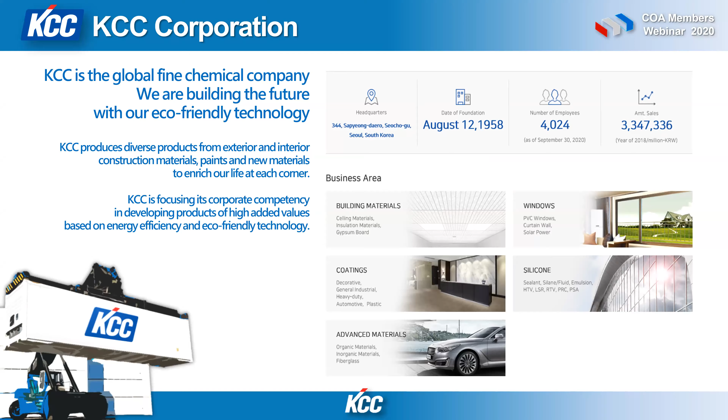Also very pleased to welcome Kim Scheibel, who most of you know. Kim is Group Segment Director for Containers for Hempel. He's been based in Shanghai, China since 2017. And obviously he's got a huge amount of experience in the industry, 40 years with Hempel, got all sorts of high-level positions in the company, and he still looks younger than most of us. So again, very pleased to welcome Kim to the panel.

Also, we have Tom McAfee from PPG. He's Global Segment Manager for the Trailer and Intermodal divisions of PPG. He's also been involved in the industry for a long time, 39 years it says here. So again, he looks remarkably well for the amount of time he's spent in this industry.

And a bit of information about PPG there. And again, you'll have the slides. You can look at that more closely later. And also, finally, we have Zorro Pan, who's Coating Technical Manager with CIMC Containers. Zorro, again, has huge experience in this industry, and you really all know about CIMC, but there's a bit of information just in case you don't.

So the way we're going to run this is we're going to have a series of questions from myself, and I'm going to ask the panelists to respond to them. And again, please feel free to ask questions during the course of the webinar as we go through it, if you've got any points you'd like to raise.

We're going to start off with the environmental legislation section, and as I mentioned, it's been a hot topic. It's an important issue, and I really want some clarification from the panelists about where we're at with the legislation, and what the implications are.

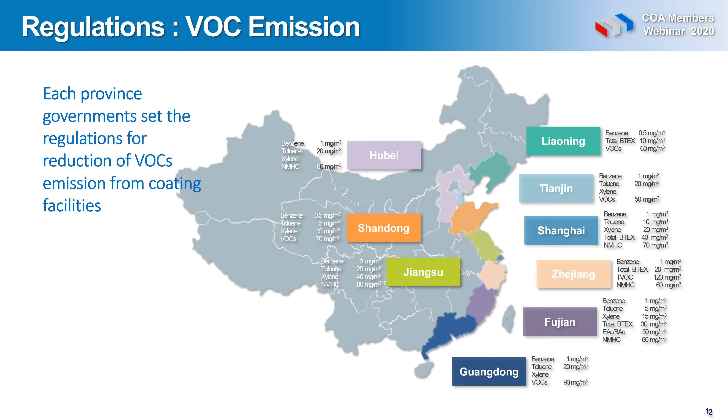Kim from Hempel, can I ask you just to summarize what the environmental changes have meant to the coating industry as far as the investment to provide waterborne coatings and technical support, what level of investment this has required, and a little bit about the changes there? Yeah, thank you, Patrick. Sure.

I can certainly say, first of all, in relation to investments, it has overall meant that we today have many more coating suppliers fighting for the same size of production, which we've had for the last 10 years or so. So the low margins we were accepting in the past have even shrunk further to a level which for the dry cargo containers have made some of us abandon the scene for a while at least. So from the dry cargo manufacturing point of view, I fully understand what happened.

We, and I mean here, speaking on behalf of all the coating suppliers, we were initially able to copy the 3-coat solvent-borne system, which, as you know, consists of a zinc-rich epoxy acrylic top coat, with an equal or better performing waterborne solution, even matching the production speed of the solvent-borne system without making any changes to the line setting. But the many new competitors saw their chance to enter this niche coating market.

And you may laugh a little bit when I say niche coating market, because for us coating suppliers, at least for some of us, it is a small niche, but still important. But some of these, they did not fully understand the application conditions. So the factories were asked to invest in more and better ventilation and heating systems, which today probably performs to an acceptable level for the owners, which are accepting the choice of the factories, who understandably are looking for the lowest cost product.

And therefore, with the current one-shift production only and the general lack of containers in the market, the factories do not have time to test any new product or ideas. They simply need to produce the highest possible output they can. So from Hempel's side, I might say that we no longer are able to compete on price, but I still dare to state that we today have not received a single performance complaint from any owner, be it from our first, second, or third generations, which were launched over the last 3 years or so.

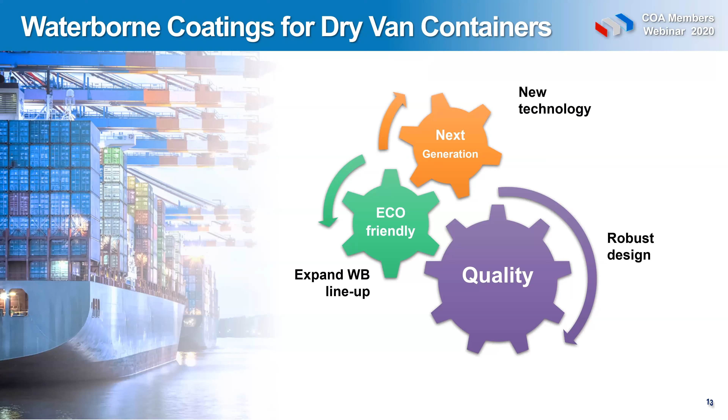Now, obviously we've been talking about waterborne coatings, but the COA work group reports highlighted a number of new eco-friendly technologies. I'm not going to suggest we go through each of these in detail, but it'd be useful just to see where we're standing with some of them. We've identified, apart from waterborne, high solids coatings, one coat systems, electrocoating, and powder systems.

Good day, ladies and gentlemen. I'm Joe from KCC. If you can maybe talk a little closer to the microphone please, so we can hear you. Okay, thank you.

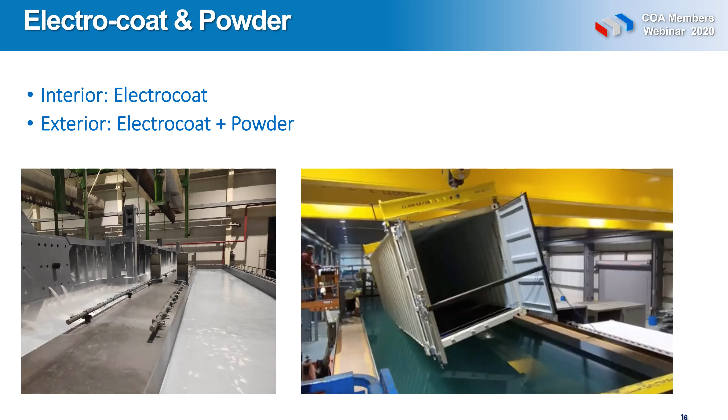CIMC also does some research on powder coating for automation. First of all, the labor cost in China continues going up. It's a fact, and it's more difficult than ever before for container factories to find enough workers to do the work. Automation is the only way to solve this problem.

In the short term, automation increases the investment cost, but in the long term it will reduce the labor and the cost.

CIMC has invested in many spraying robots at the door, front end, and base coating process. It works, and we save a lot of workers, and the efficiency has improved indeed. The reason is not only automation, because we also increased the workshop area and refined the working process, so the efficiency has improved not only by automation.

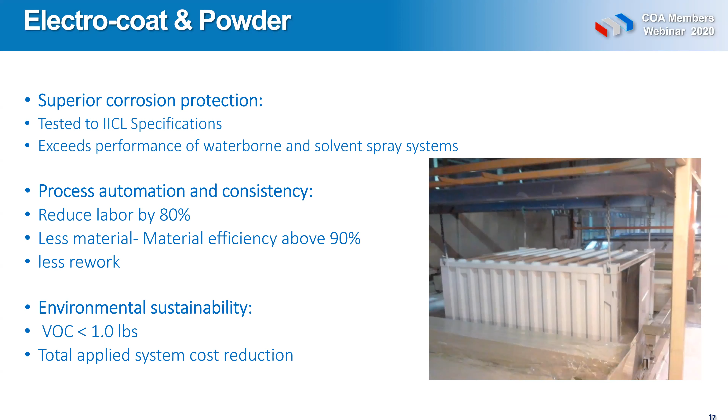I'm just looking, I've got a couple of questions coming through. How does the container industry compare with ships, rigs, and other? Okay, I'll come back to that one later in that case. Any specific questions on these new technologies at the moment? No, okay, fine. Well, we'll move on to the next. I've got a question coming in, but I think I'll hold that for the end.

That was just a photograph of some of the applications of electrocoating and powder systems. I think that gives you an example of some of the work that's been done there.

So now we come to part 3 of the webinar, looking more specifically at reefers. Although reefers were exempt from the first stage of environmental policies, legislation and regulations are now being introduced. We're now going to discuss developments with reefer container coatings. So I'm going to ask Kim Scheibel, please.

Kim, could you just clarify the existing coating specification and the likely changes that are going to be implemented in the coming year? Sure. For reefers, there are 2 main options currently used today in the shipping industry for reefer containers carrying foodstuff. That is, on the cor-ten frames, either a hot spray metallization or a zinc-rich epoxy paint. Those are the 2 options used on the areas which can corrode.

Then on the MGSS panels, a special epoxy primer is applied over the MGSS panel and over the cor-ten frame, with an acrylic or polyurethane top coat. Doors are painted separately on a special line, and they are also made of MGSS. So that's again a special epoxy primer, and normally with a PU, because it's nice when the doors look nice before you stuff the foodstuff into the container for carriage.

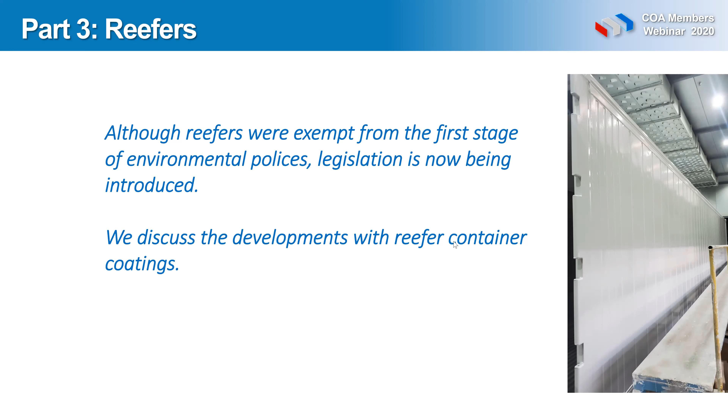But for waterborne coatings, if we want to trial those, then we need longer lines and more ventilation and drying capacity. So it's a little bit difficult to test really online with the current systems. And if waterbornes are introduced to the reefer production, the challenge will further be that the temperature needs to be controlled from the very first point they enter the factory until they are dry and out of the factory again.

Okay, well, I know you've got some slides, which we're going to show later on about some of your other solutions. Can I ask the gentleman from KCC, maybe you can give us an update on the timing of the implementation of the changes for the reefer container coatings?

Yes, sir. This is a working timetable suggested by the CCIA China, for the waterborne coat switch on new building reefers. According to the original plan, the switching time should be the very beginning, 1st January of next year. Now everything is postponed due to various reasons, especially for the COVID year this year. According to the latest information from the CCIA, they call for collective action with all 6 major reefer manufacturers and major paint suppliers. They have a draft plan that almost all major reefer plants are going to commence their painting line modification in the middle of next year. Usually it will take 1 or 2 months for the line modification, depending on individual situations. We expect maybe from the second half of next year, July or August, we'll complete the transition to the new coating system on the reefers.

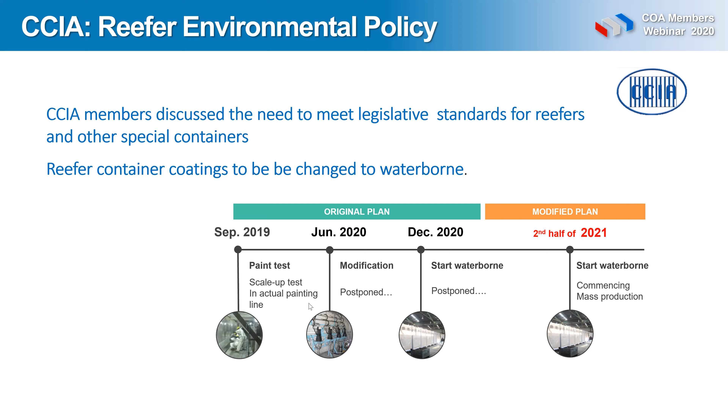KCC. Could the gentleman for KCC indicate? I know you've done some work on new products for waterborne coatings for reefer containers. So could you explain to us why you think that the waterborne coating system is better than, or the best solution for reefers?

Now, first of all, waterborne technology can reduce the VOC content by more than 90% compared to the current solvent-borne system. That means the capacity of environmental equipment also can be reduced. And second, there's no need for special spray equipment like a plural feed spray machine with a temperature control unit, and it's relatively easy to adjust the spray parameters immediately, like viscosity and film thickness and so on. Additionally, the reefer painting line's drying time is, I think, long enough compared to the conventional dry van container painting line. So the modification can be minimized compared to the dry van container painting line.

Basically, we have good references in the solvent-borne area, the zinc, epoxy, and acrylic or urethane top coat, which was proved by the market for decades. We have designed the final coating film with similar chemicals as the solvent-borne container coating system, but use water in our products. That's all. Yeah, that's all my opinion.

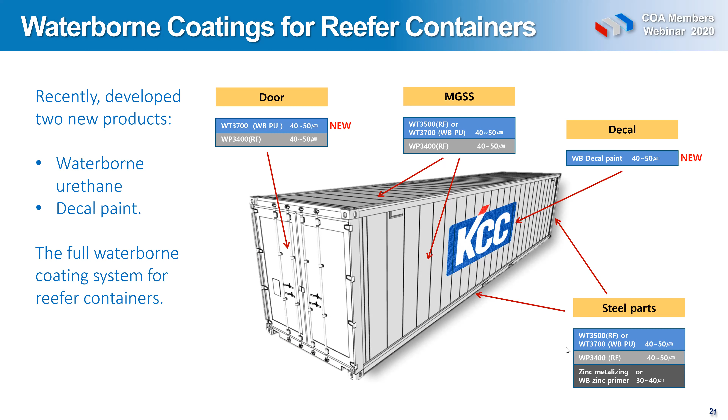Who would you like to address that to? All the panel? I think anybody on the panel who can comment on that would be very welcome. Thank you. I would like to answer some of them at least. I don't know, Patrick, if you have a few slides I sent to you earlier today. Let me maybe, yes. Those,

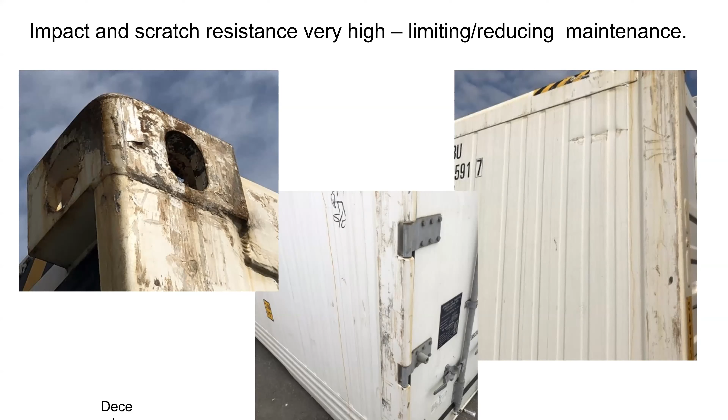So I would say there are definitely alternatives, but it does require a different set of pumps. But that's a relatively small investment, which probably would be in a range, I would guess, around less than 200,000 euro compared to 6.3 million euro to switch to a waterborne layout.

Okay, so that's one possible solution then. Do any of the other panels want to respond to this question about the appearance? No, not at the moment, but clearly this is something we're going to have to look at. Patrick, this is John Williams here from Triton. John, hello. Kim, the pictures that you're showing, that's your one coat system put over hot zinc spray. Is that correct? That is absolutely correct.

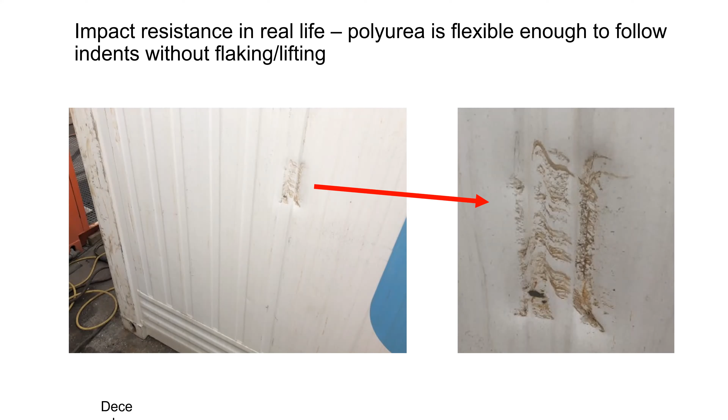So one of the issues that we're facing right now is the possible elimination of hot zinc spray. Did you test your system with no hot zinc spray? Oh yeah, you can apply the same system over zinc primer, but I'm very much a fan of the hot spray zinc because I think it offers, as you can see here, a fantastic anti-corrosion performance. So I have no problems continuing with the hot spray, which I think is a great solution. I would not mind selling some zinc coatings as well, but I can certainly accept and applaud what the hot spray zinc does for the container life. So I'm happy to continue as is.

I don't see the problem, because hot spray metallization is used in so many industries with great success. So why do we have to abandon a great product solution in the container industry? I don't get it. I think we are looking at a different agenda here. Because, as Mark was saying before, we need to have the long lifetime, and then we need to look for the best. Yes, I agree.

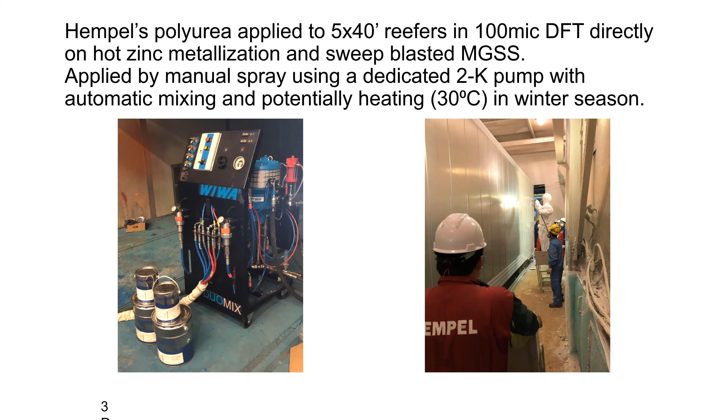Good. Thank you very much indeed. Clearly, there are lots of questions and not all of them have been answered properly, but very much appreciate the discussion we've had. And I'm going to suggest that probably we'll have another webinar specifically looking at this issue of reefer containers and coatings in January of next year. The original idea of this webinar was to look at the work that the COA work group had done on the container coatings report, which is available on the website. And obviously it's evolved a little bit since then.